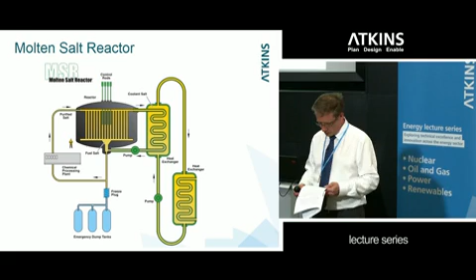So what else is different about a molten salt reactor? Well, the temperatures are significantly higher than light water reactors. The temperatures they operate at are typically between the melting point of the eutectic, which is around 450 degrees C if you're talking about eutectics which contain lithium and beryllium fluoride, up to about the material compatibility temperatures associated with materials you use for reactor components. So that's up to about 800 degrees C, so significantly hotter than light water reactors.

The other advantage is that as a eutectic, salts have very high boiling temperatures. So you're talking about 1400 degrees C as a boiling temperature for salts. So you don't need to have these systems pressurized, which is quite an advantage when you talk about the engineering solutions associated with molten salts. But of course, they do have other challenges operating at those sort of temperatures and in the presence of salts.

So, probably enough about molten salt in its general form, because Barry's going to be talking about that in a lot more detail later on. What I'd like to do is just skip through very, very quickly some background and context, some of which is common to nuclear energy as we go forward, and say it's some very common issues, so I won't take too long on it, and then a couple of specific issues around molten salts.

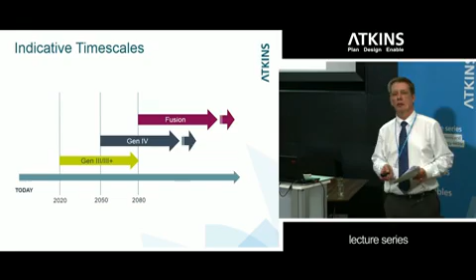Just looking at indicative timescales, when we're looking at molten salts, we're not talking about timescales associated with the current Gen 3 plus Gen 3 reactor program that's going on at the moment. What we're talking about is actually filling the gap between the end of the current new nuclear build program and the beginning of commercially viable fusion. So we're talking about a reactor technology which we're looking to deploy around 2050. Now, I know some people might think you can do it earlier than that, but it's just really a general date around when commercially viable Gen 4 reactors might be apparent.

That might seem a long way off, but like all new technologies, the length of time it takes for R&D programs, development programs, is quite considerable. So we ought to be thinking about it now.

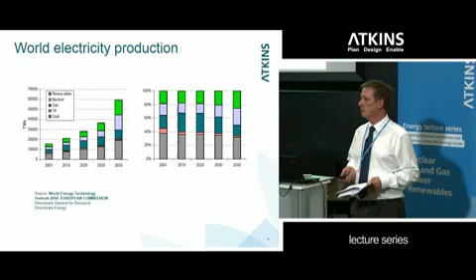A couple of other things, and this is known to us all, but energy consumption. We know that energy consumption within the UK and globally is actually increasing, and this just shows the World Energy Technology Outlook 2050 estimate of energy consumption up to 2050, looking to approximately double, which is quite a challenge both in the UK and globally. So bottom line is we need more generation. But that generation has to be done in a way that's actually contributing to our reduction in carbon emission targets.

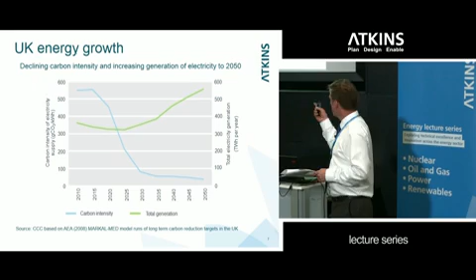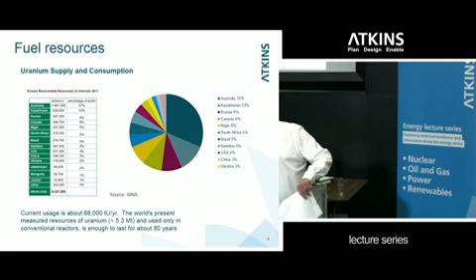Plus also, whatever energy source you're talking about needs to be sustainable. We know that carbon fossil fuels are finite. They don't naturally help in the carbon reduction arena unless you have it combined with carbon capture, carbon sequestration. And they're going to get more expensive as they get harder to extract and their availability goes down. And the limitations on reactor fuel can also be seen.

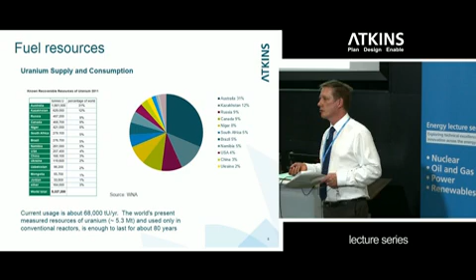When you talk about the fuel that currently supplies the majority of the world's reactors, it too is a finite resource. This is just the estimate of the current abundance of uranium in the world, taken from the World Nuclear Association website. And that current level, which is 5.3 million tons of uranium, if we operate it through the thermal uranium-plutonium cycle, we've got about 80 years of uranium left. So that sort of drives us to new reactor technology, which is either breeder or closed fuel cycle in nature. That's unless we start looking at a different sort of fuel.

And that fuel could be thorium. Thorium, unlike uranium-plutonium, is not fissile, it's fertile. So you need a source of neutrons to start the reaction, regardless of whether you put it in a molten salt reactor or not. And thorium metallic fuel's been used in other reactors in experimental form already around the world. But thorium has some advantages.

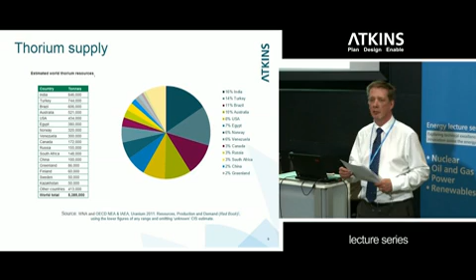It's actually abundant in almost every continent in the world. And if you look at total thorium content compared to uranium, you're talking about probably about 3 times as abundant as uranium around the world. If you compare fuel-grade uranium to fuel-grade thorium, then you're probably talking about 100 times more abundant than uranium. So it does provide advantages, especially over the longer term in terms of a sustainable fuel. But that's only one of the options for molten salt reactors.

I think the most important thing, and some of you in the room will have picked up this from the things you're involved with, at the moment within the UK, there seems to be a real appetite to get the UK back to the top table with respect to reactor technology and reactor development. Well, this was started off by the work that was done by Sir John Beddington in 2012 with the Reactor R&D paper that he put together.

Sorry, I've just lost my place.

Which has actually led to some initiatives following on from that that have been put in place by government, such as the redefinition of the National Nuclear Lab's remit, with it being a wholly government-owned organisation. The instigation of the Nuclear Innovation and Research Advisory Board, headed by Dame Sue Ion.

And the development, or the production and issue of documents such as the Nuclear Vision and the Nuclear Industrial Strategy, is issued by the Department for Business, Innovation and Skills. And what I'd like to do is just pull out a few of the statements from that report, just to reflect the appetite.

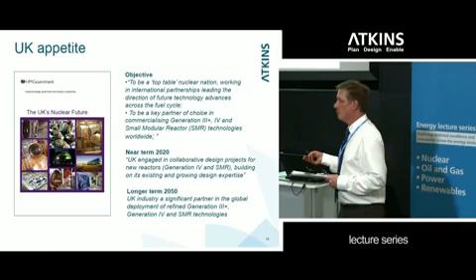I mean, you know, that's quite impressive in terms of an ambition and aspiration. We've not seen aspirational statements from the government to that extent for quite some time. So that's really a good primer. And that's why it's quite a good time to start talking about and having lectures like this evening's lecture.

But if we look at what that's trying to attain, the last time that the UK was at the forefront of everything nuclear back in the 50s and 60s was a different place, a very, very different place. And what I'd like to do, just to get us into the mood, to think about how we might get back to that top table, is to indulge in some nostalgia and have a little bit of reflection. Some of you will recognise this. Let's have a look back to when the UK was indeed leading the world, when we were opening what was then the world's first commercial nuclear power station, Calder Hall in 1956.

Calder Hall was the first nuclear power station in the world. Everybody loves a lover. The public were promised electricity that would be too cheap to meter. Anyhow, that's how I feel. Wow, I feel just like Pollyanna. It is with pride that I now open Calder Hall, Britain's first atomic power station.

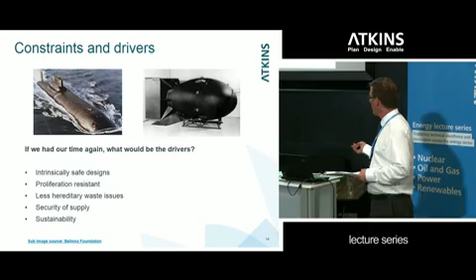But looking at things today, would we do things differently? Would the drivers be different? Would the imperatives be different? Some of those drivers I'm putting up here, and Barry will talk about them in a little more detail later. We need intrinsically safe reactors. We need them to be proliferation resistant. Production of less hereditary waste: can we get reactors that do not produce transuranics as part of their life cycle? Security of supply and sustainability. And molten salt reactors do answer some of these questions.

So what are the options going forward, what will the future look like for the UK, and what could we do? Do we persevere with the current light water reactors, Gen 3 plus reactors currently being built with their 60 to 80-year lifetimes with life extension, knowing you could get improvements on those designs with light water reactors with greater passive safety features and more simplicity?

Or do we continue with uranium plutonium, but on a closed fuel cycle rather than an open fuel cycle? Or do we build upon other UK legacy technologies that we have in abundance through our sodium fast reactor program at Dounreay and our high temperature gas reactors? The current fleet of reactors, the AGRs, are gas reactors after all.

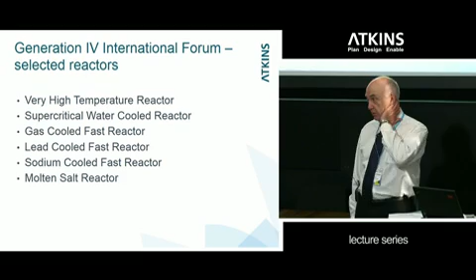The types selected, and I think they started with 200 and worked their way down to these 6 types. The very high temperature reactor, supercritical water cooled, you can read them all. I don't need to read them out. And the standard depiction of the first 5 are these, and this is perfectly available, and they show those designs, or really artists' impressions or conceptual drawings of the first 5 of those designs. I don't propose to discuss them here.

By the way, the very high temperature reactor and the supercritical one are operating in the thermal region, so they will need a set of fast reactors to provide them with fresh fissile material. But the others are breeders anyway, or could easily be so configured as breeders. Some aren't being progressed at all, as far as I know. Others are being, in some senses. And some have very prominent and powerful advocates.

The French, for example, are spending on the sodium-cooled fast reactor, 650 million euros announced in 2010 for Astrid. Presumably that's on a refusal to be beaten basis. But never mind. Notwithstanding the influential supporters of these, and some are very influential, it is my opinion that these 5 remain cul-de-sacs. Alluring cul-de-sacs, expensively promoted cul-de-sacs, but dead ends nevertheless. Why? I think we have to ask, are these once through or part of a breeder cycle?

Now we could argue about the amount of uranium-235 in the world, and that's exercised many people. And there have been innumerable arguments about which reactor families would exhaust the U-235. But uranium is only about as abundant as tin. And only about 0.7% of that is 235, and that has to be extracted or separated by exotic means. Now, we could discuss seawater at length, I hope not.

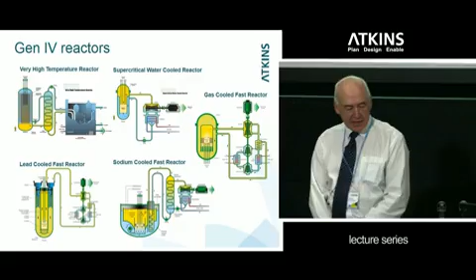Some people tell me that the world will need to be persuaded of the benefits of plutonium, and it's an advocacy problem. One of the faults of our community, our nuclear community, is we are very deterministic. We expect a yes or a no. This is the planet Earth. There is no World Nuclear Safety Committee. There is no Wizard of Oz behind the curtain. There is nobody to say, no, stop it, go and do something else.

What there will be is decades of minor frustrations, little delays, questions, obstacles, maybes, perhaps a bit of unobtrusive sidelining. That's what will happen if we persist in pursuing a plutonium economy basis. Because I want to talk about another element. Now, thorium and its use in molten reactors is an interesting topic. Thorium has had a checkered press over recent years.

It was seized upon by many writers on the green end of the spectrum maybe 3 or 4 years ago, as being nuclear without all the nasty nuclear bits, sort of additive and colour free nuclear. But these were writers whose scientific attainments were such that they think Ohm's law is a detective series. So then there was the inevitable anti-thorium backlash. The truth, as always, is much more complex than can be depicted in 140 characters or less, which is what the world seems to want these days.

The reason I labour the point in discussion on molten salt reactors is the first 5 of the Generation 4 concepts employ solid fuel elements and are, theoretically they could, but sort of forced to use the uranium-238 to plutonium-239 breeding cycle, rather than thorium-232 breeding to uranium-233.

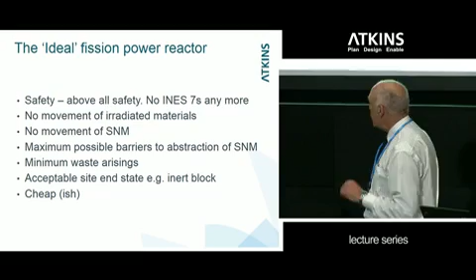And I've said cheap-ish, and I've said ish because we haven't seen the benefits of such a reactor yet, because we haven't got a plausible design for one yet that we can cost up. Because benefits go with cost, and I hear so many people talk about the cost of molten salt reactors. Can they compete with LWR? We can't possibly talk about competing with LWR because we haven't got a benefit cost basis to talk from.

And if we cast our minds back to that Carolina beach in 1903 and asked Orville and Wilbur, well, Orville, what do you think the market will eventually be prepared to pay for this gadget you call an aeroplane if it ever becomes popular? I don't know whether they would have got between them the correct answer. And a Boeing 747 with average options will cost you $350 million, and they've sold hundreds. So let's not be put off by the cost until we've seen a plausible device and what it can and can't do.

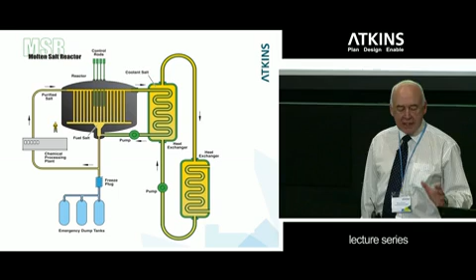The molten salt reactor, as we've seen this picture before, is one in which essentially the fuel and coolant are in liquid form. 3 main systems: a molten salt core, or the containment, some heat removal and power conversion system, which we've cut off. I mean, you could put a Brayton cycle, you could put a Rankine cycle, any sort of cycle you want on the end of that, and a salt processing and cleanup system.

Now, this isn't going to be a very technical review of molten salt. This is sort of a primer because you can get deep quite quickly. It's a bit of a scene setter, and it's a bit of a call to arms, as Paul has said, to get the UK into this very, very promising field. There's a number of options. There's a number of choices of configurations and materials under these headings. Paul said there's about 17 or 18 different concepts and artist impressions out there, all stoutly defended by their inventors, who equally stoutly denounce the other 16.

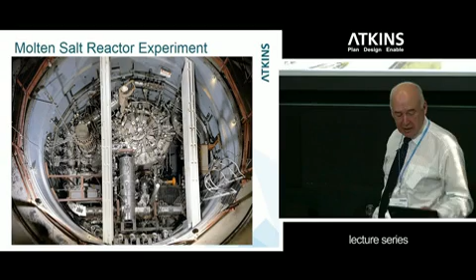Superseded by a much bigger contraption, and for scale, there's a nice chap there. I have got a laser pen, which I was only going to use to blind difficult questioners, but I will point out the man that shows the scale. 8 megawatts thermal, 65 to 68 it ran, 30% enriched U-235, ended up running a bit on 233. Its longest power run was 6 months. That's not bad. I have to say, I went to Culham, the site of our toroidal fusion device. Their longest power run is 10 seconds, and they're thrilled to bits with that. But there's still a long way from a workhorse power plant for the world.

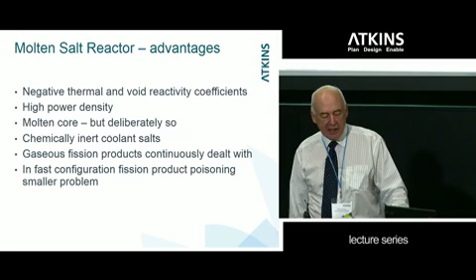Some advantages. Negative thermal and salt void reactivity coefficient, as opposed to Chernobyl's, which had a positive reactivity coefficient. My word, there's an exciting way to run a reactor. So the hotter the fuel gets, the more it expands and reactivity decreases. Certainly in the fast spectrum, that is fairly obvious. High power density, as Paul mentioned, but low pressure. You don't have to contain it with a dirty, big, thick pressure vessel like you do steam, because steam is very high pressure. This takes a lot of heat, but is at atmospheric pressure.

The salts are chemically inert; they don't show the high energy reactions of, for example, zirconium or sodium with water. And some of the most hazardous fission products are the gaseous ones. They build up in a fuel pin normally, held in by the plenum spring on a PWR or a big stainless steel jacket on an AGR. And if there's a rupture of the fuel clad, all the accumulated gaseous fission products leave and enter the atmosphere.

On a molten salt reactor, you can't stop them leaving actually, but you would bubble them out with a helium sparge to take out the xenons and the kryptons. And in the fast configuration, fission products can be allowed to build up in the loop because the capture cross-section of fission products in the fast region is much smaller than the capture cross-section for neutron poisoning fission products in the thermal section.

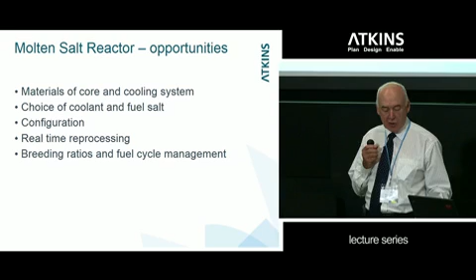Now there's huge grounds for development there. There are huge problems, but every problem is an opportunity, and the field is wide open for the UK to get in as we have good skills on all of these, and I'll just quickly cover a few. Materials of the core and the piping. These are temperatures where ferritic martensitic steels start to struggle, and especially in the presence of high neutrons, the nickel is another problem. But some Czech and Russian labs believe they have produced materials that can provide containment for the core and the coolant. But there are other ideas out there, ceramic coatings, nitride coatings, so plenty to go at.

There are many options for the composition of the salt itself. Nothing new about salts. Aluminium is the electrode one from bauxite. Molten salt is a fairly common process in industry. As Paul said, most of the discussions are around the fluorides, but other halides are discussed. Chlorides are discussed. I've even seen people talk about the iodides and the bromides. Lithium is a problem with tritium. We've got to be careful about that, but that's another topic to be discussed later.

And there are many and varied layouts, all sorts of different configurations. In some options, the coolant function, the fission process, and the breeding step are all in one fluid, the single fluid choice. In others, the coolant is separated from the fuel, so the two functions are separate loops, two fluid systems.

There's all sorts. I've seen a team from Brazil present a case for one that is cooled by molten lead, and the fuel flows through a nest of 20,000 small tubes, a very high temperature reactor. They're talking about 1,000 degrees outlet temperature, so a bit of a materials and production challenge there, but also tremendous opportunities. Right, okay.

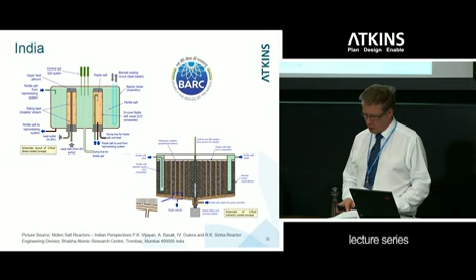And then there's India. If you think back to an earlier slide on the thorium abundance, you see that India is a country with a lot of thorium. And India have got an expectation that they will actually supply about a quarter of India's energy from nuclear sources, up from the current 3%, and that thorium as a fuel will play a major part.

And in March last year, India made the press announcement that they'd actually launched a new nuclear reactor program with thorium at its centre. But that program is actually primarily around the use of solid thorium plutonium fuel as an energy source for fast breeder reactors and then ultimately breeders through their advanced heavy water reactor program. But also there's a lot of research going on molten salt reactors as well.

And this research is being led by the Bhabha Atomic Research Centre in Mumbai, BARC, and they're currently undertaking analytical research, so it's paper-based research looking at best options for molten salt reactors in terms of things like fuel utilisation, breeding ratios, moderator lifetimes, deciding what type of reactor is best, whether you're talking about thermal, epithermal or fast reactor.

And this slide just actually shows a couple of molten salt reactor options that BARC have considered potentially worth pursuing. And I'm not going to go into details of those. The slides are going to be made available and the links are on the bottom, so hopefully you'll be able to find those on the web.

So what can the UK's contribution be to molten salt reactor programme going forward? We all know that these international programmes all have considerable challenges. Barry's actually mentioned a number of challenges technically to support the delivery of molten salts on a commercial basis. But we have to look at these, as Barry said, as opportunities. But it's worth noting at the moment the UK not only has no input into the Gen 4 reactor programme, it's got no major programmes associated with molten salt reactors.